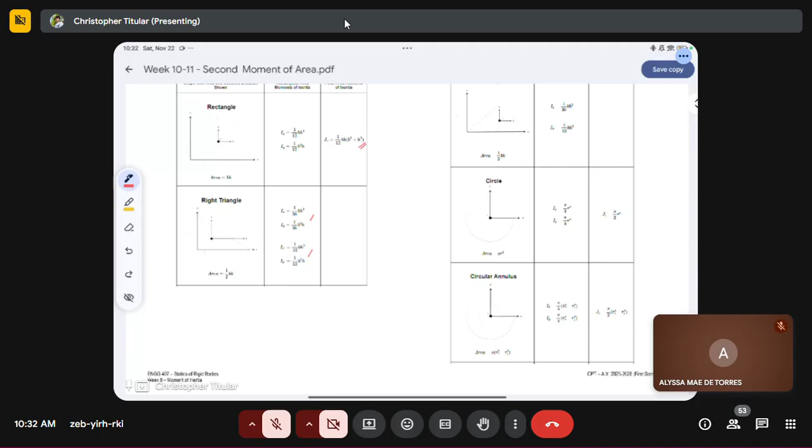So for this day, our topic is about radius of gyration. If we talk about radius of gyration, it is an imaginary distance from an axis of rotation to a point where the object's mass or cross-sectional area can be considered concentrated to have the same moment of inertia.

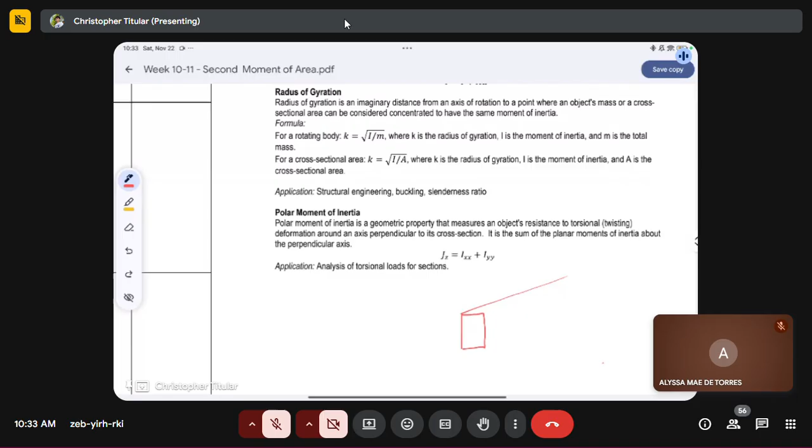As you can see here, for example, we have a length like this, a section like this, and at the span of our beam we have these supports: a pin and a roller. So for radius of gyration, which we refer to as K, it is the imaginary distance from the axis of rotation at which the mass or our cross-sectional area has the same moment of inertia.

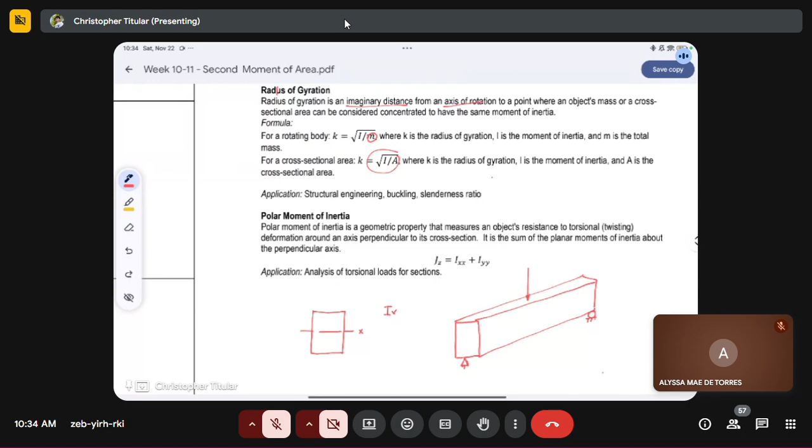For example, we have an applied force here, and we will be considering this section. We get our x here, and we solve for Ix. So if we solve for the radius of gyration using the cross-sectional area, mostly what we solve is the radius of gyration using the cross-sectional area, since using mass is mostly for rotating bodies, which is mostly for mechanical engineers. But for us civil engineers, we will be talking more about the cross-sectional area of our steel sections, beam sections, column sections. So after solving Ix, we have to solve for Kx, or K.

K is the square root of I over A. This K is our radius of gyration. So to solve for the radius of gyration, it is I over A. That means if we have an Ix here, therefore this must be Kx. But if we are talking about the y-axis, the formula is Iy over A. So the meaning of K is that from the x-axis, we have this radius.

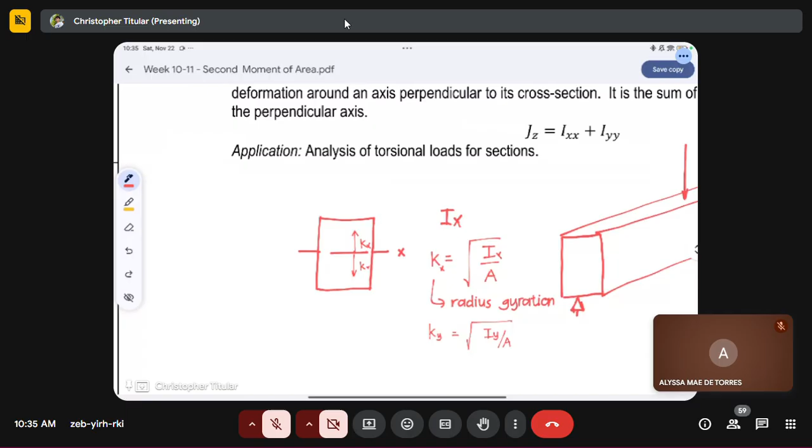So let's say this is our K, our Kx. This Kx is the distance at which we could consider that the moment of inertia from the distance Kx from the x-axis is equivalent. So basically, the reaction or resistance of our section from the x-axis using the radius of gyration at x, Kx, is equal. That is the main definition of radius of gyration.

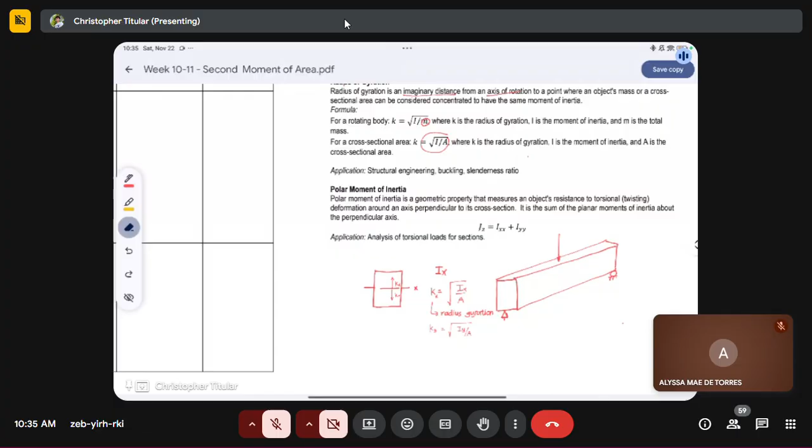On the other hand, I've listed here the uses of radius of gyration. In structural engineering, it specifically refers to buckling or slenderness ratio. The more slender our section is, or the larger our slenderness ratio is, that means our radius of gyration is small, meaning it is not appropriate to use some sections which have a higher slenderness ratio.

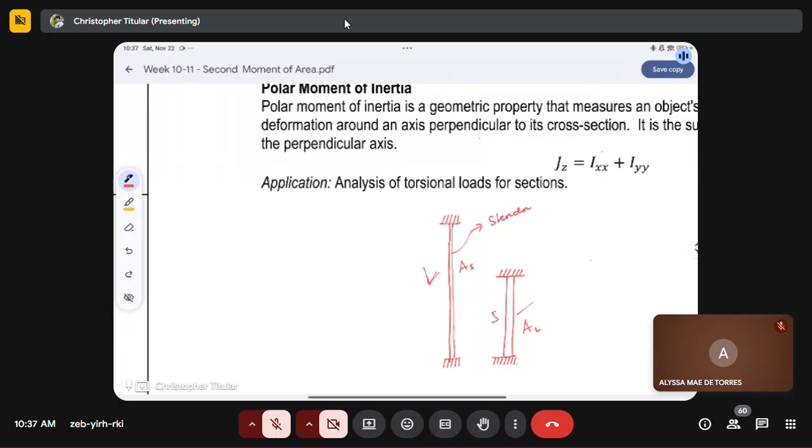So as you can see, lower yung ating slenderness ratio, the better. We must consider that on the design. So that's how we use, or that's how we need to know ano ba yung radius of gyration ng ating section.

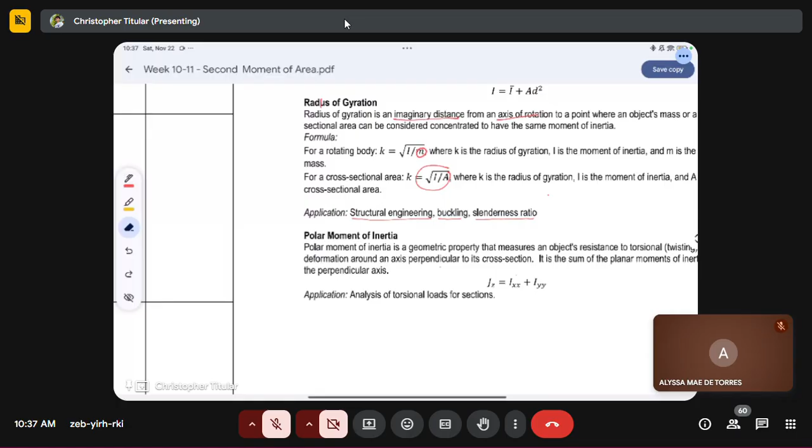Okay, so next topic that we will be discussing today is the polar moment of inertia. Unlike dun sa ating moment of inertia or second moment of area, so sa second moment of area is just Ix and Iy, or Ix prime or Iy prime. But polar moment of inertia is the summation of Ix and Iy, or Ix prime and Iy prime.

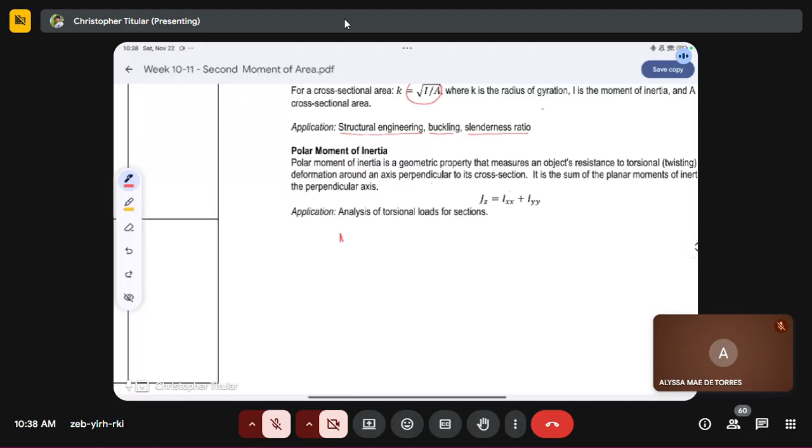So ano naman yung nire-resist ni polar moment of inertia? If we have the moment of inertia, sulat ko dito. So if we have moment of inertia, and then we have the polar... send ko na to kay Crystal. Si Crystal ang gagawa ng moment of inertia.

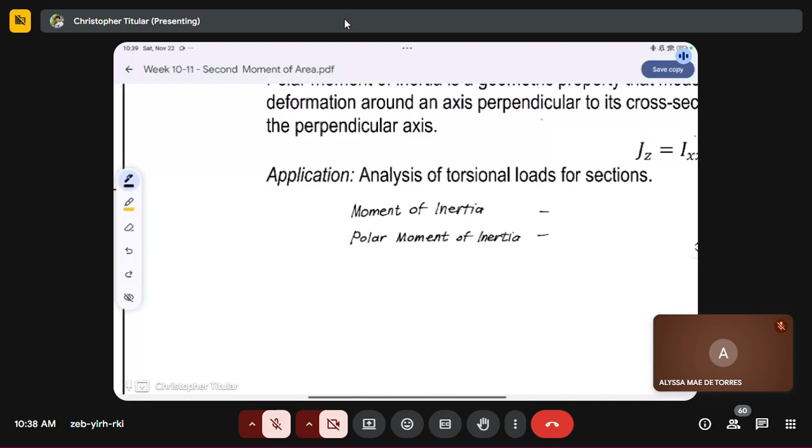So again, ano yung nire-resist ni moment of inertia? Ask ulit, si Princess Lavinia, ano ang nire-resist ng moment of inertia? If nakikinig last week, ano yung nire-resist ni moment of inertia? Nakinig ba? Si Nikailaan, nakinig ka ba last week? So wala nakikinig last week. Kaya wala napasa, ganun? Sige, take nyo na lang, bahala ka sa buhay nyo.

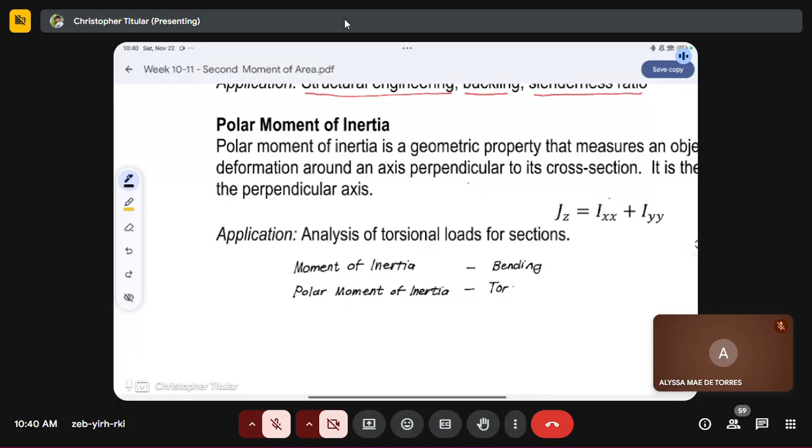So si moment of inertia, it resists bending. Unlike polar moment of inertia, it resists torsion. Ayan, kakatamad magturo pag ganito. So ano ba yung tinutukoy natin na torsion?

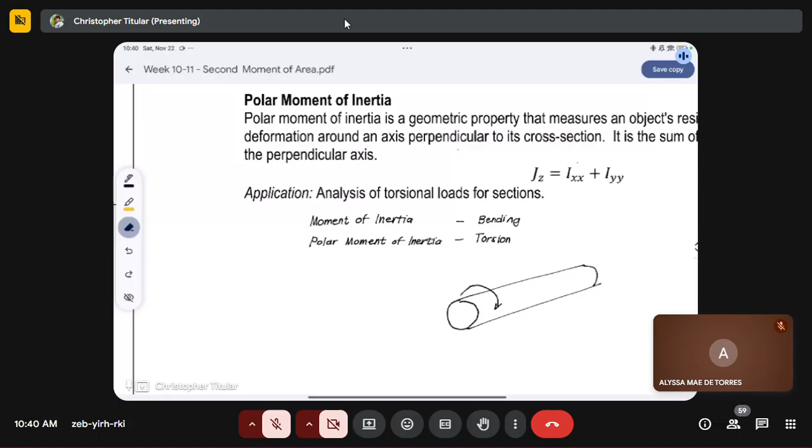For example, we have here a circular section, and then we have here this length, and then meron tayong in-apply na moment dito. So paikot siya, so ang tendency is that, mas better siguro if we will be having a rectangular section as an example. So this one is our rectangular section. Meron tayo nilagay dito, or in-apply na torsion, moment, torsional force. So ang tendency ng shape natin is that it would create deformation on this.

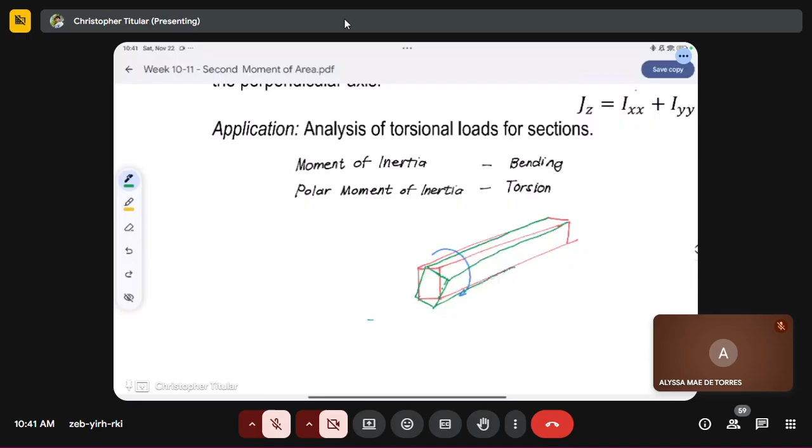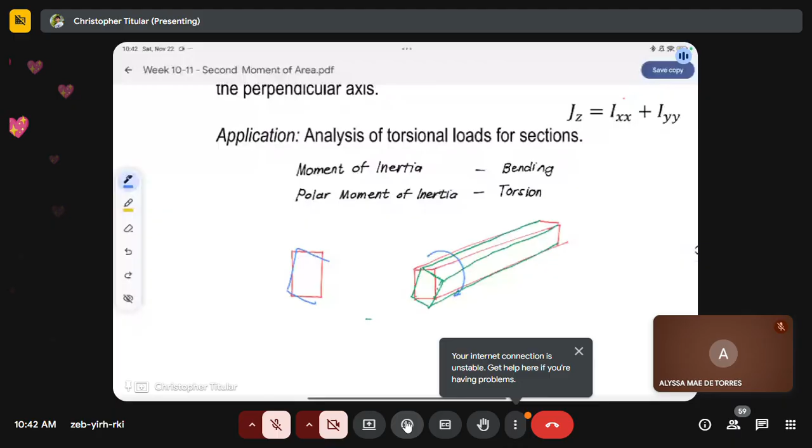So ito ko nilang kulay. Nakikita nyo ba yung torsion na tinutukoy ko? O masyadong mahina yung imagination? So if we have this, wala kasing sinasagot. Okay miss. So yan, yan yung tinatawag na torsion. It is the rotation of the shape or yung cross-sectional area natin on the X and Y axis.

If we have the torsion, so we need to resist it using a higher polar moment of inertia, for which ang ibig sabihin pala, so we have the moment of inertia resisting bending at an axis. But if we are talking about two axis, or yung torsion natin, so we will be using a higher polar moment of inertia to resist that torsion. So intindi ba yun? Naintindihan nyo ba?

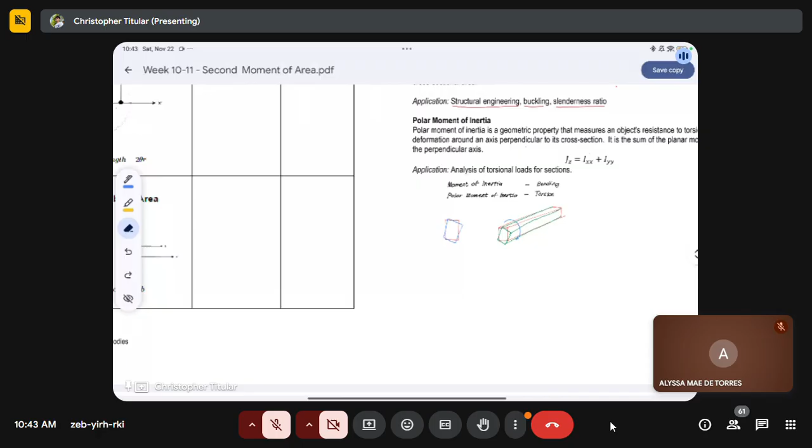So yun, yun yung difference ng radius of gyration, polar moment of inertia, and moment of inertia or second moment of area. So you need to master kung paano kunin yung moment of inertia, kasi kapag mali na yung pagkuha nyo ng moment of inertia, meaning mali na din yung polar moment of inertia nyo in case napakuhanin. So in that case, wala kayong magiging score. So that you need to focus more on moment of inertia. And then after getting the concept of moment of inertia, therefore it is easier for you to define or to find the value of polar moment of inertia and also the radius of gyration in case na pinapahanap sa inyo sa problem.

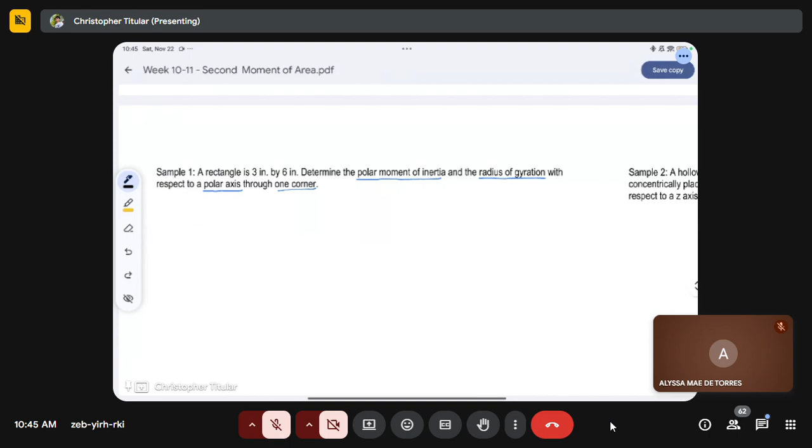So for our example 1, it is a rectangular 3-inch by 6-inch. Wala siyang figure but I'll be having here the figure, drawing ko na lang siya. So ang sabi, we have a 3-inch by 6-inch na rectangle. So in case naman na sa problem, for the major exams and quizzes, I'll be giving some figures para hindi malito kung alin ba yung base and height doon. So we have here problem, 3-inch by 6-inch, and ang pinapahanap sa atin is polar moment of inertia and radius of gyration with respect to the polar axis through one corner. So ibig sabihin, let's draw the figure. So meron daw tayo dito, meron daw tayo ditong rectangle.

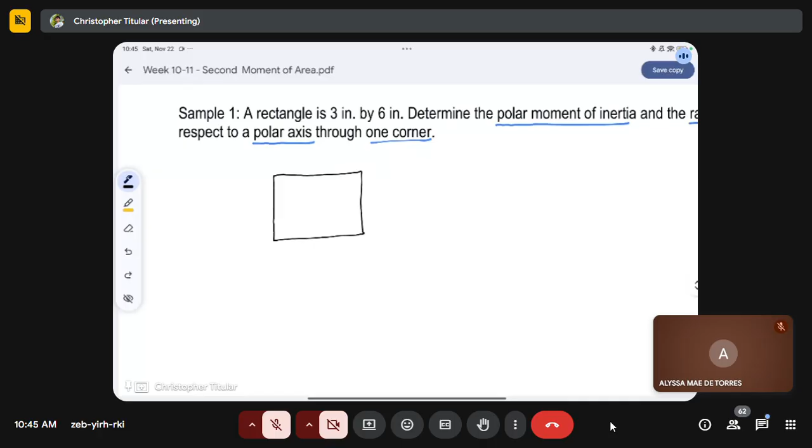We have a 6-inch base and a height of 3 inch. The axis must be on one corner, so let's use these two corners. This one is the y-axis and this one is the x-axis.

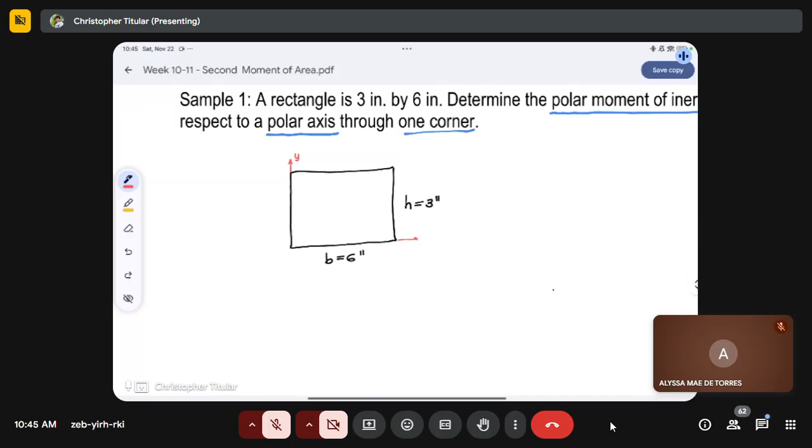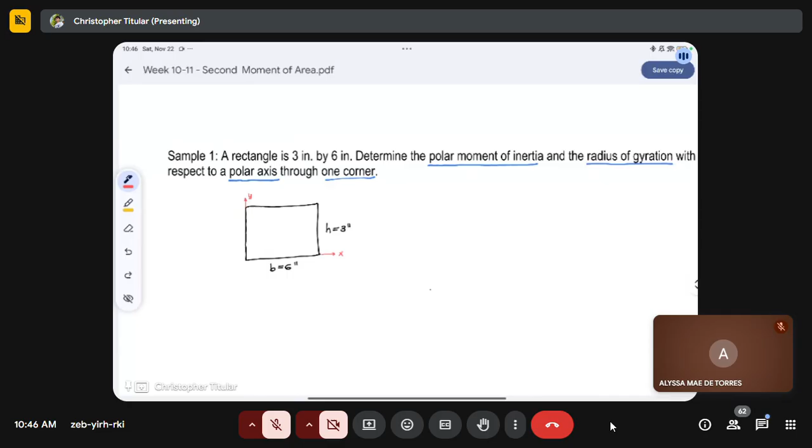What is the first step when finding the polar moment of inertia and radius of gyration? First, we need to find Ix and Iy. So we have Ix equivalent to BH cube over 12, or BH cube over 3. BH cube over 12 is for our centroidal axis.

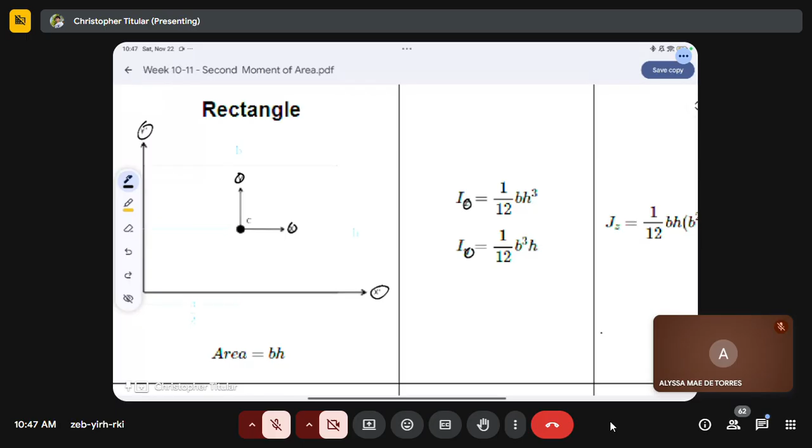If we look here, for the rectangle we have x prime. This is what's being referred to, or what we're looking for in the problem, x prime and y prime. The given to us is x and y axis. Meaning we need to transfer this using the transfer formula of our moment of inertia.

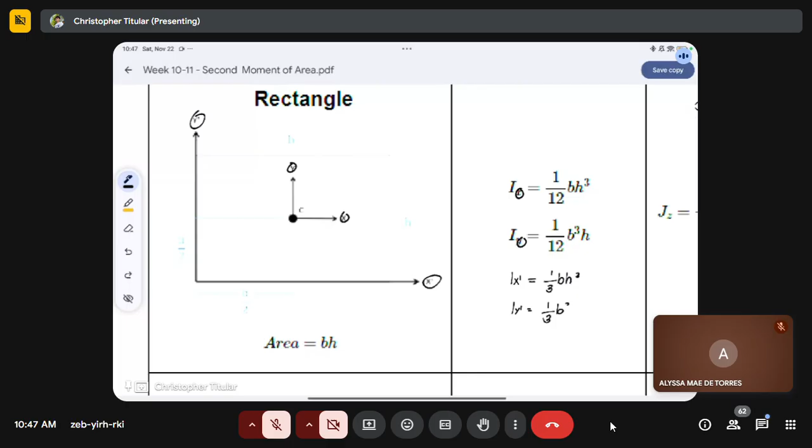But last week we already solved it. So Ix prime is equivalent to 1/3 BH cube and Iy prime is equivalent to 1/3 B cube H. Remember how the transfer works? That is the centroidal moment of inertia plus area times d squared. If you've forgotten, review it because it may appear on the exam.

But let's try to transfer it. So for example, let's do y prime and x prime. We have the given, y and x axis, such that this distance is half of h, which is 1.5 inch. And here, this is base over 2, so 3 inch.

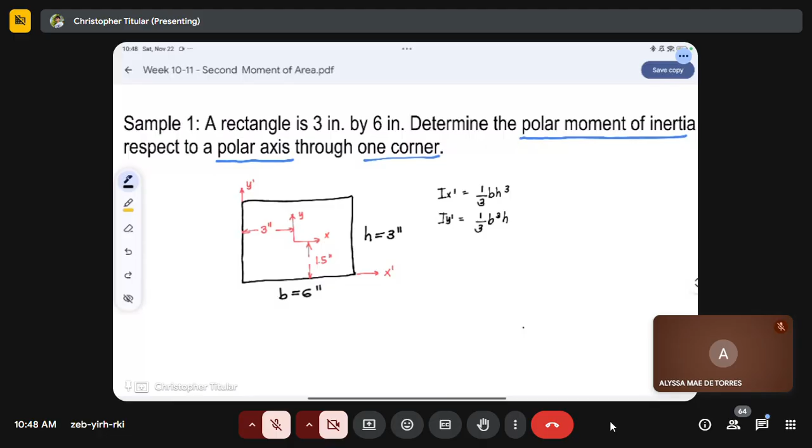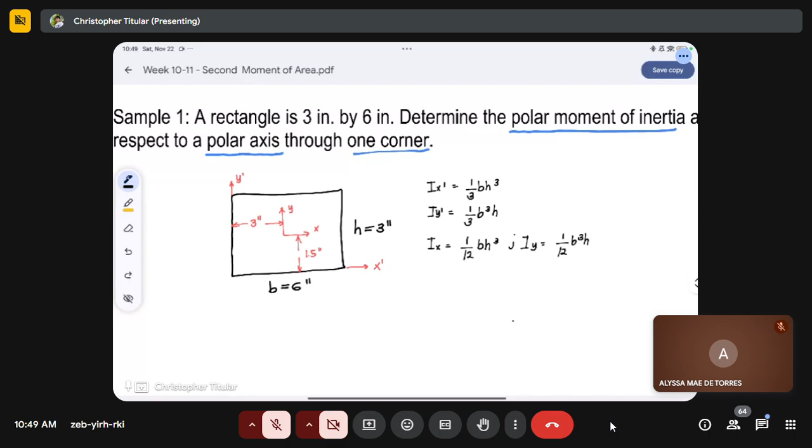So we can transfer it. Let's prove that Ix prime is equivalent to 1/3 BH cube and Iy prime is equivalent to 1/3 B cube H. Let's use the given from our table: Ix is equivalent to 1/12 BH cube and Iy is equivalent to 1/12 B cube H.

Let's use the transfer formula. I prime is equivalent to Ix or Iy plus A D squared. So Ix prime is equivalent to 1/12 BH cube plus the area of the rectangle, BH, times D, which is the distance from the x-axis to x prime, h over 2, squared. Therefore this is 1/12 BH cube plus 1/4 BH cube. Solving this, we get 1/3 BH cube.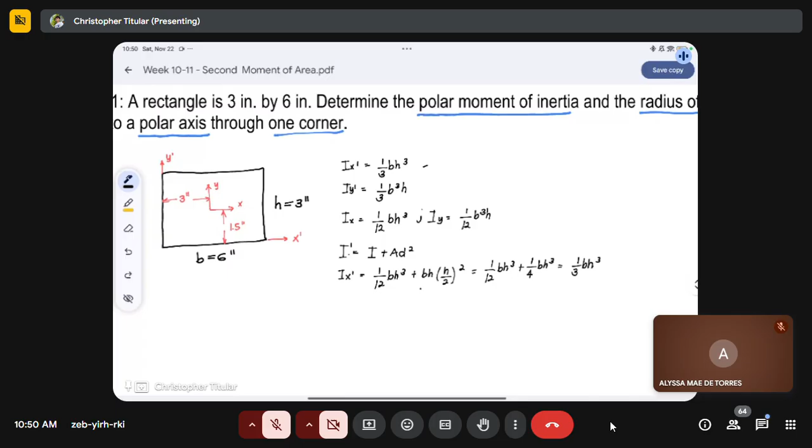So that's correct, we proved that Ix prime is equivalent to this value. Same approach with Iy: Iy prime is equivalent to 1/12 B cube H plus the area times base over 2 squared. Same approach, only the cube changes. So the answer is also 1/3 B cube H. We proved that Ix prime and Iy prime are equivalent to 1/3 BH cube and 1/3 B cube H respectively.

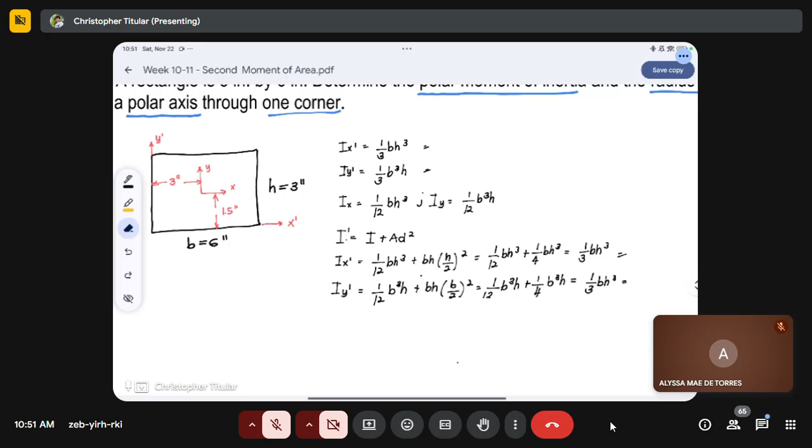Now let's try to solve for the moment of inertia. We have Ix prime equivalent to BH cube over 3. So we have 6 inch times 3 inch cube over 3. The answer is 54 inch raised to 4.

And then we have Iy prime, which is B cube H over 3. So this is 6 cube times 3 over 3, which is equivalent to 216 inch raised to 4.

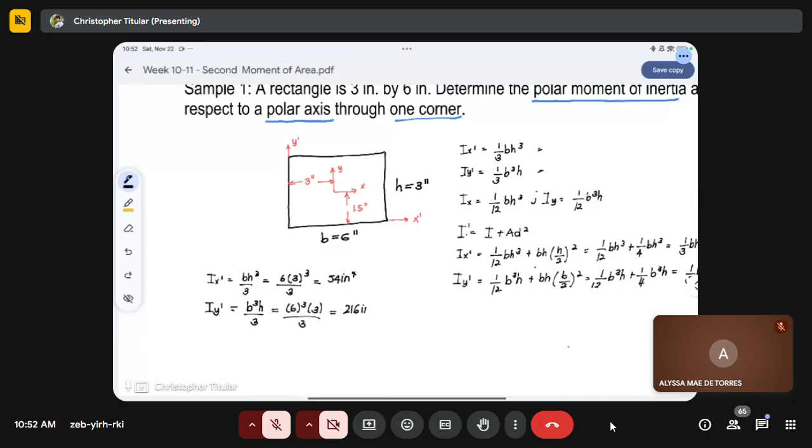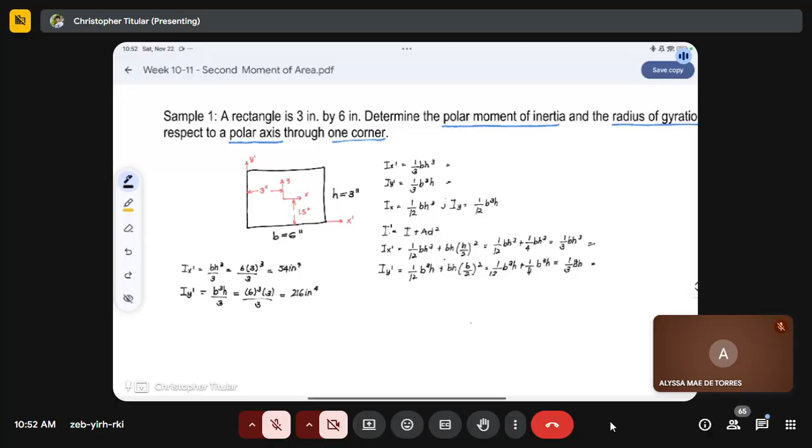But what's being asked is the polar moment of inertia. The polar moment of inertia, Jz, or the moment of inertia on the axis, is just the summation of our x and y moment of inertia on the same axis. Meaning for Jz, Jz is equivalent to Ix prime plus Iy prime. So we have 54 inch raised to 4 plus 216 inch raised to 4. Meaning our polar moment of inertia on the corner is equivalent to 270 inch raised to 4, and that is our answer for the polar moment of inertia on the one corner.

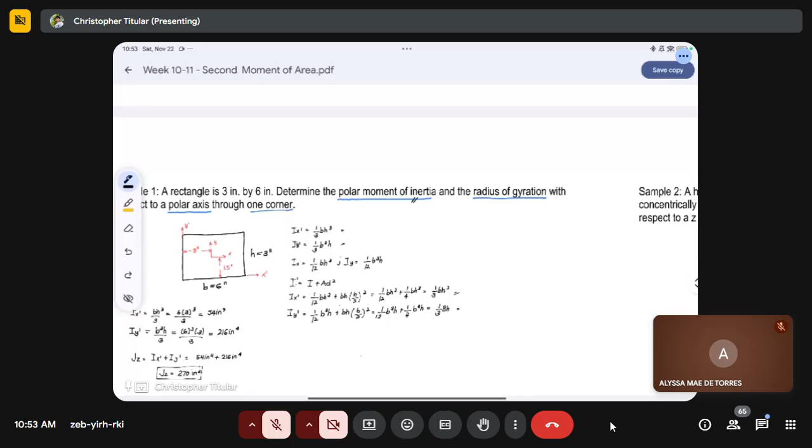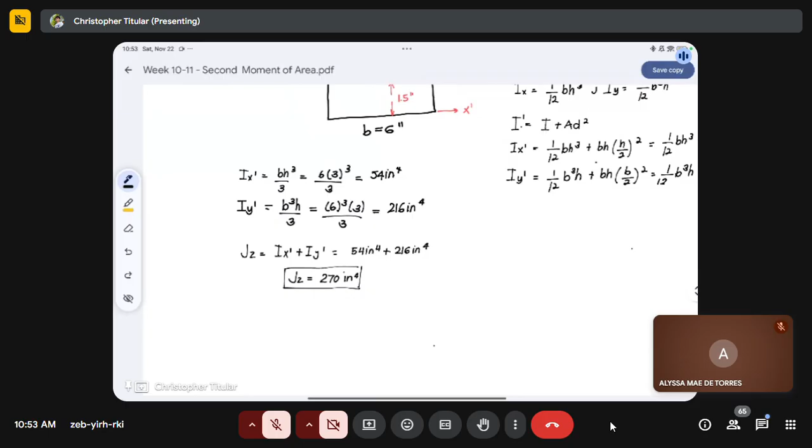So that means even if you compute the moment of inertia at the corner, the answer is the same, since what's being asked is the polar moment of inertia on the axis. Same with the radius of gyration—what's being asked is the radius of gyration with respect to the polar axis through one corner. So that's for Jz or Kz.

So this one is equivalent to... it is equivalent to the summation of Kx plus Ky.

So both prime, or simply square root. What is our formula for K? K is equivalent to square root of I over A. Meaning for Kx prime, it is equivalent to square root of Ix prime over A. And for Ky prime, this is equivalent to square root of Ixy or Iy prime over A. Meaning this one is equivalent to square root of Ix prime plus Iy prime over A.

Or simply, square root of Jz over A. So therefore, for Kz, it is equivalent to square root of 270 inch raised to 4 over our area. What is our area? It is base times height, which is 6 inch by 3 inch. So if we solve for Kz, the answer is 3.873 inch. So this would be our answer for example number 1.

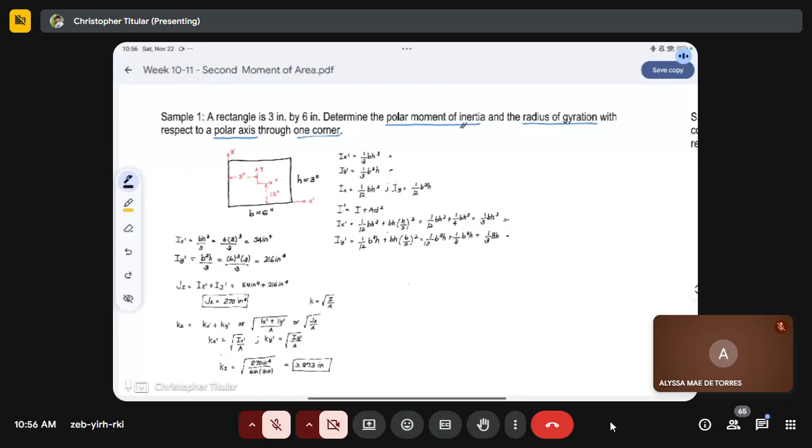So Kz is the radius of gyration with respect to the polar axis. If we talk about the polar axis, that is the intersection. So here, radius of gyration with respect to polar axis, because it wasn't specified as radius of gyration with respect to x-axis or y-axis. If we talk about polar axis, meaning you will be using the polar moment of inertia.

So in case what is asked is radius of gyration, what is that? Radius of gyration on, for example, x-axis, the one to use is square root of Ix over A. But if we talk about y-axis, it refers to square root of Iy over A. But if we talk about polar axis, meaning it is the square root of Ix plus Iy over A, or simply square root of our J over A. So that's how you analyze the problem.

Is that clear? Okay. So let's proceed to the next. So the next sample problem is...

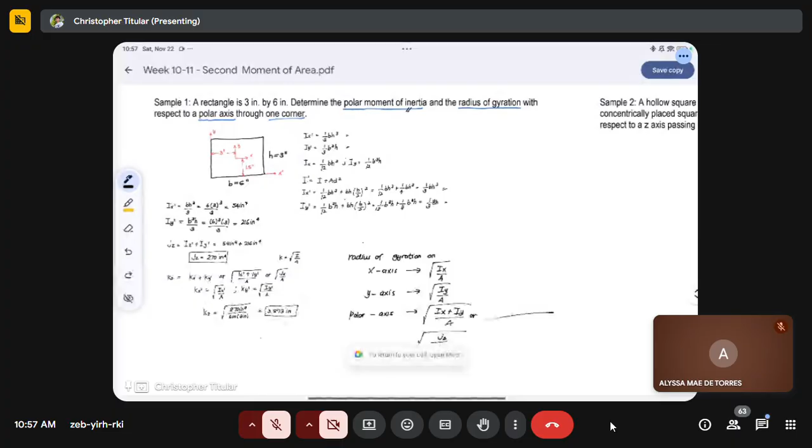Also simple, but it has a hole in the middle. So let's try to draw first its figure. Wait a moment.

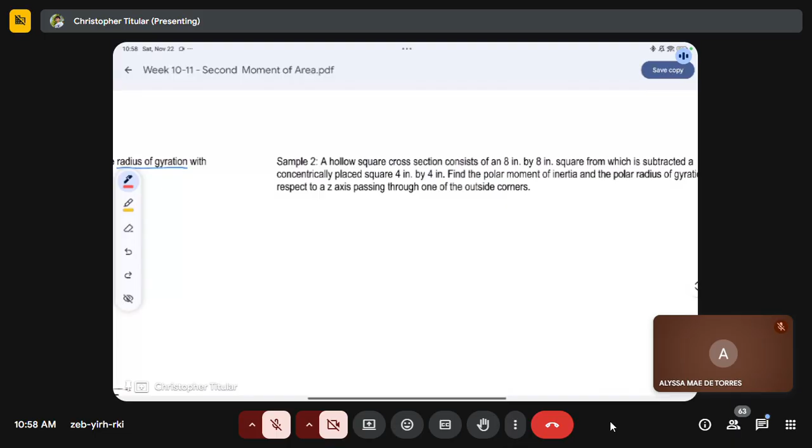The problem says: we have a hollow square cross-section consisting of an 8 by 8 inch square from which, concentrically, meaning at the center of the 8 by 8 square, we have a punch or hole of 4 inch by 4 inch. Then we need to find the polar moment of inertia and polar radius of gyration. Meaning polar, we will be using I or J with respect to the z-axis passing through one of the outside corners.

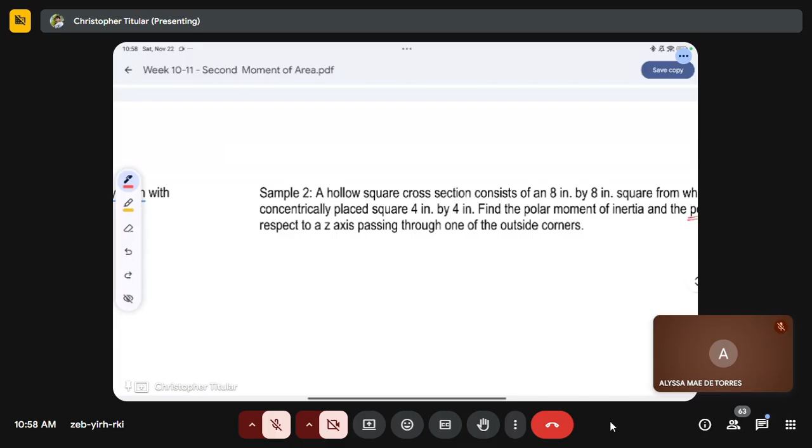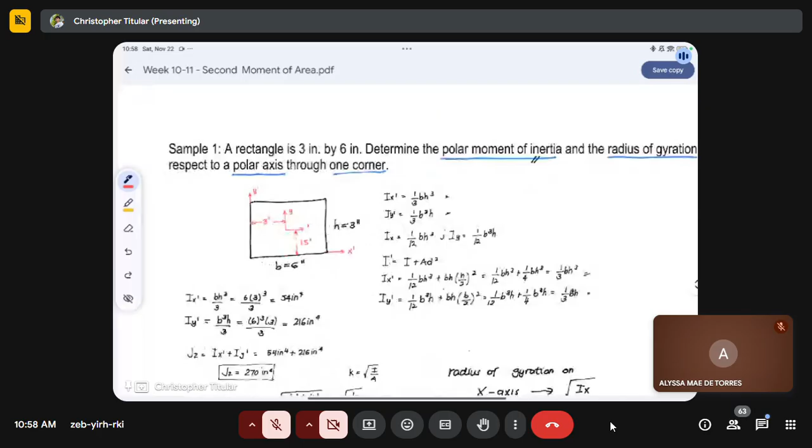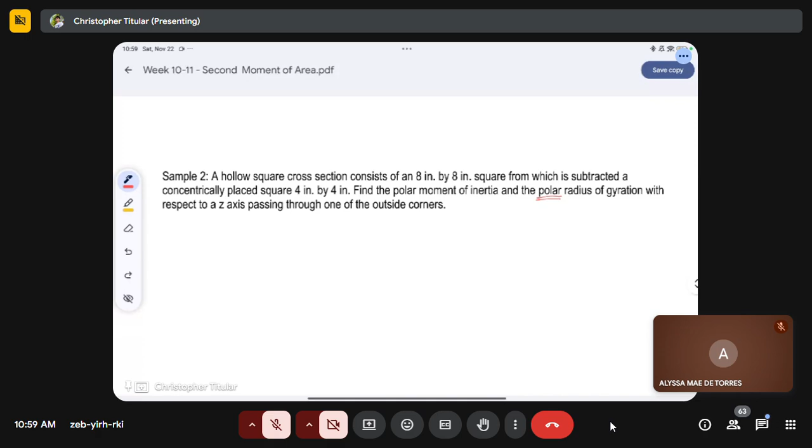So for example, on this problem, we need to find the polar moment of inertia and polar radius of gyration with respect to the z-axis passing through one of the outside corners. So for example, we have here an 8 by 8 inch square. Wait a moment.

This one. So concentrically, meaning the centroid of this is equivalent to the centroid of the other. For example, this, my mistake, this is the y-axis. So this is the centroidal axis of our big square, which is 8 by 8 inch. And then concentrically, meaning the centroid of our big square is also the centroid of our hole. So let's draw it.

So we will have a smaller hole here or smaller square. So this one is... 2 inch. 2 inch, ah, 4 inch actually. 4 inch. Let me just complete the drawing.

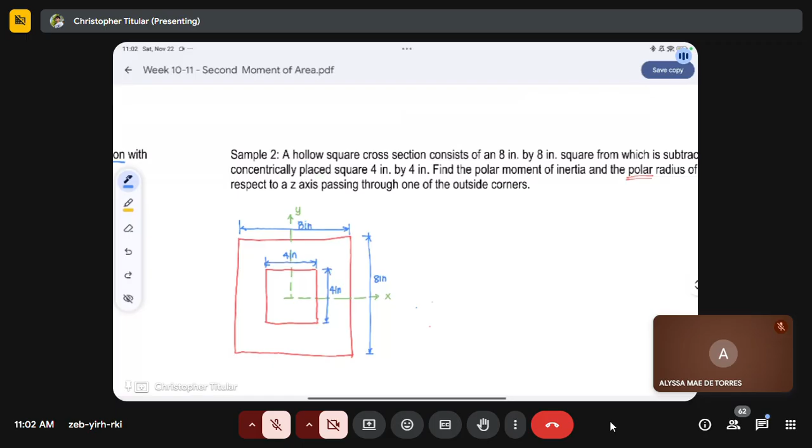Ayan, yung figure natin. We have to determine the moment of inertia or polar moment of inertia and the polar radius of gyration at the z-axis passing through one of the corners. Meaning yung ating x and y axis, ayan. So ito yung ating y prime, at ito yung ating x prime. And then ang sabi, we have the z-axis.

So gawin nating 3D figure. So this is our z-axis. Itong section na to, i-consider natin siya as 3D figure, so mag-extend siya all throughout that side, para ma-consider natin or ma-visualize natin yung ating z-axis. Kaya nagkaroon tayo dito ng z-axis.

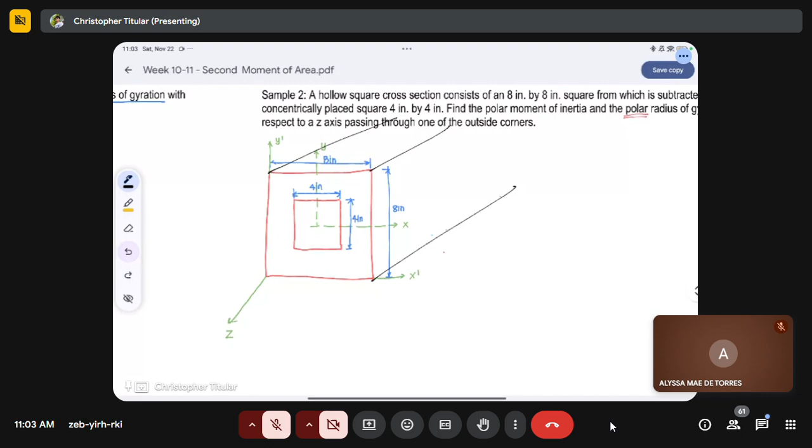Naintindihan ba yon? So you will be considering an extension para magkaroon tayo ng z-axis. Either of the sides or either of the corners you can consider, parehas lang yung magiging sagot natin.

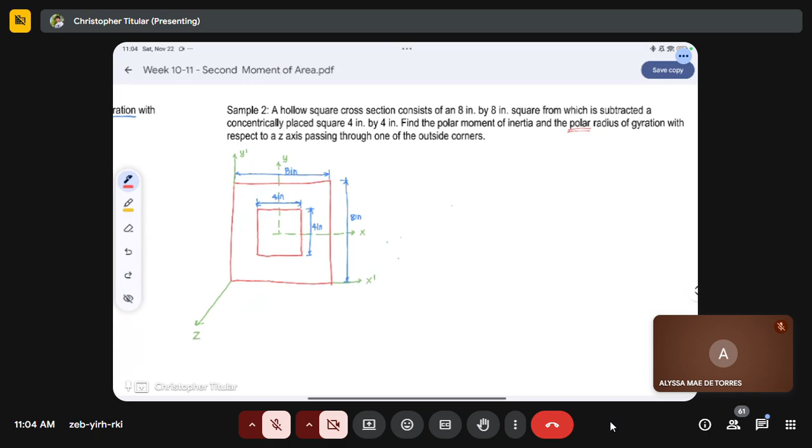Okay, so first thing is that we need to determine Ix and Iy. Consider muna natin, since may hole, so mag-table tayo or mag-tabulation tayo. Let's try to use tabulation. Consider natin yung ating big square as number 1 and si small square naman yung hole, yung number 2.

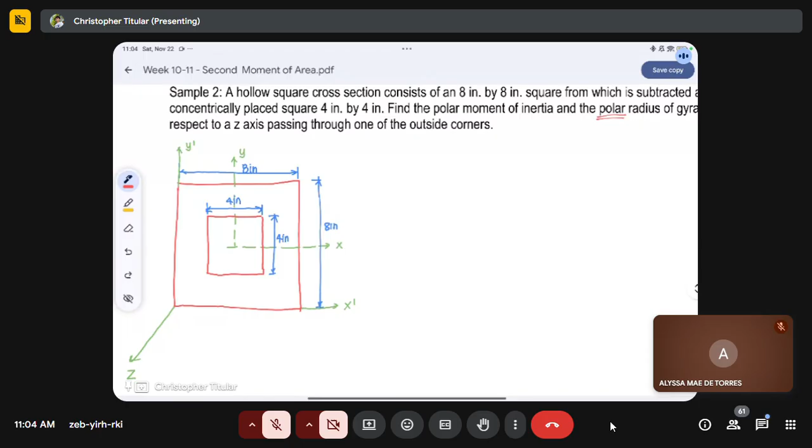So for area, for example figure 1, figure 1 is the bigger one. Ano ba magandang ipangalan? So we have shape na lang. So we have 1, which is the big one, and 2, which is the hole. And now we have to determine the area in inch square.

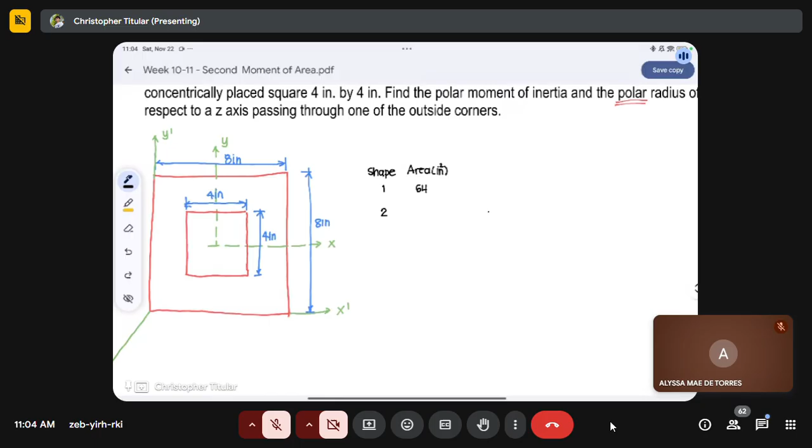So yung area ng big natin is 8 by 8, which is 64 inch square. And then for smaller, or yung ating hole, that is 4 by 4, which is negative 16 inch square. Bakit negative? Since it is a hole, dapat isubtract natin yung area niya.

Ayan, and now let's consider the centroidal moment of inertia, for Ix and for Iy. Later we will be transferring it. So kung i-consider natin si Ix, ano ba yung formula ng Ix natin? Ix is centroidal, so it is 1 over 12 BH cube. And then for Iy, it is 1 over 12 B cube H.

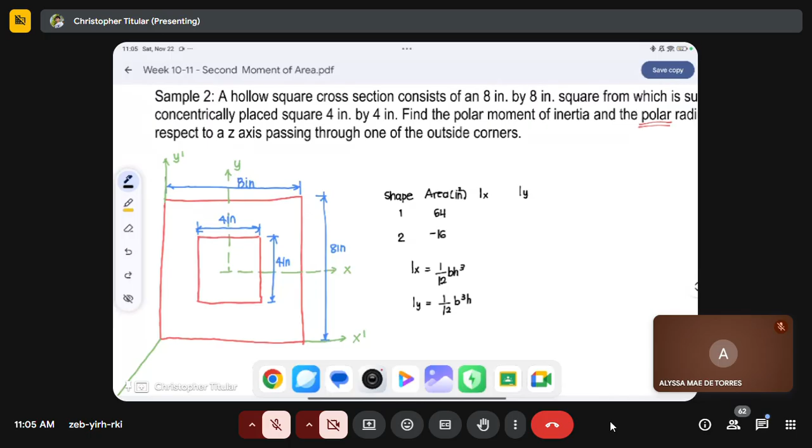May question ba? Guys, may question? Joyce, may question ba ko, Joyce? Pamute na lang pag walang question. Yan, halatang walang tao, yan.

Siguro napindot lang, ayan. So we have Ix and Iy, so we have here the formula for Ix and Iy. Let's try to solve yung Ix muna, so Ix for the bigger square, if we use the formula, that is 1 over 12 times base niya, which is 8 times 8 raised to 3, since 8 din yung height niya.

So meaning this one is 1024 over 3, or simply 341.333 continuous siya. And then for kanyang Iy, same lang din siya, since base and height is similar or equal. So we will be having 341.333 continuous. Ayan, and now let's consider the hole.

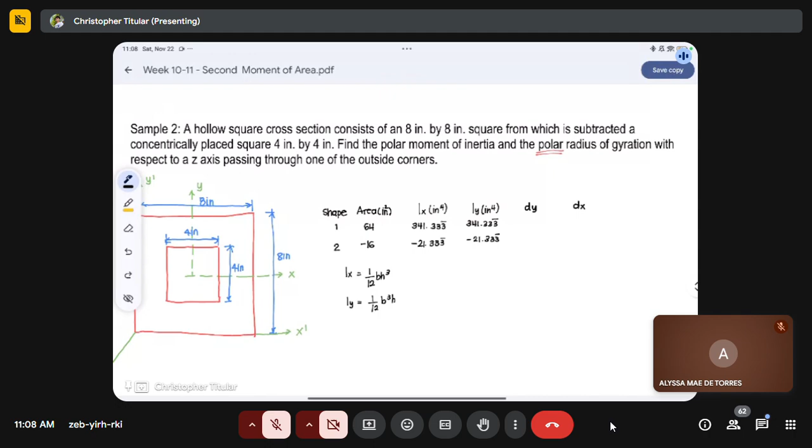So now let's determine ano ba yung dx and dy natin. So we have dy and then we have dx, in inch. Si dy muna tayo, si dy in inch. Meaning, from the centroidal moment of inertia natin or yung x natin, ano yung distance niya dun sa kukunan natin ng moment of inertia, which is the x prime. So we need to determine this. This one is our dy and then this one is our dx.

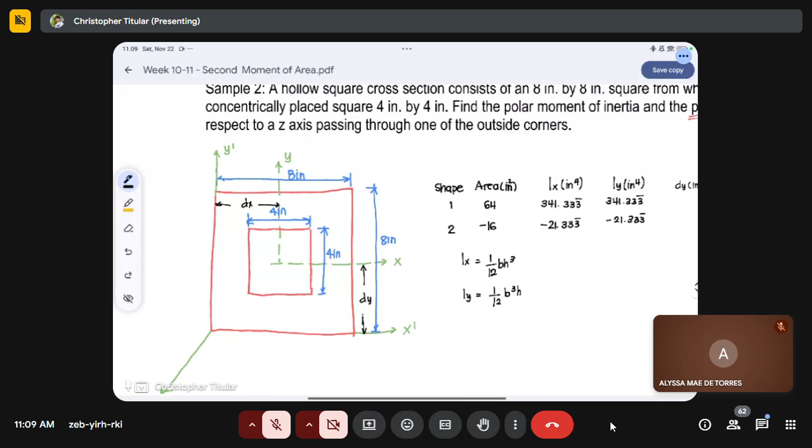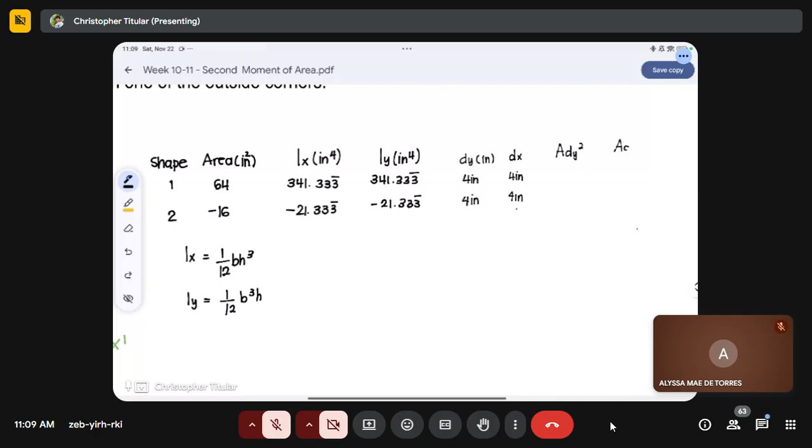So now I'll be giving you time to solve for ADXY or ADY square and ADX square. So kayo naman yung mag-solve. Then I'll be trying to ask some of you mamaya if same naman yung nakuha nating values.

What's the value? So that is 1024, right? So 1024 inch raised to 4. And then similar with ADX, so ADX squared. It's the same naman, so that is also 1024.

And then for shape 2, since the area or hole is negative, so that must be negative. So negative 16 times 4 squared. So that is negative 256 for both ADY squared and ADX squared.

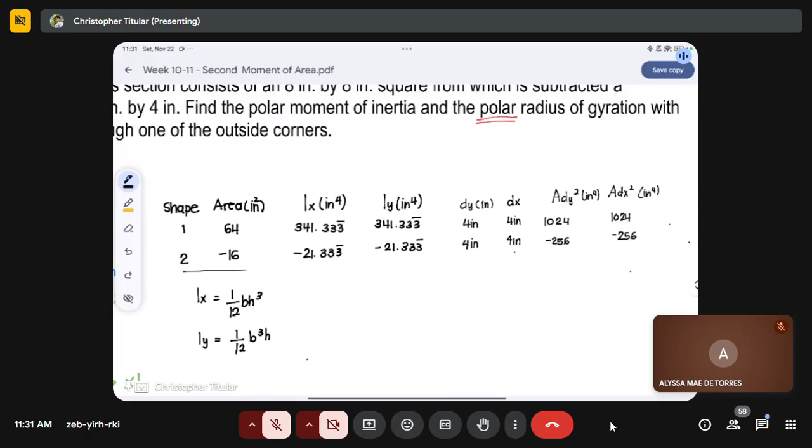Now let's try to get the summation. So what is our formula for Ix prime, or our transferred moment of inertia? So it is the summation of Ix plus ADY squared. Similar with Iy prime, it is equivalent to the summation of Iy plus ADX squared.

So meaning we need to sum this four columns. So for this one is equivalent to 320. This one is also equivalent to 320. And then for this one, so 1024 minus 256, so that would be 768.

So we will be using this formula, summation of Ix, that's 320, plus summation of ADY squared, that is 768. So this is equivalent to 1088 inch raised to 4.

So same approach with Iy prime. So that is also 320, and then our ADX squared, plus 768. So this one is equivalent to 1088 inch raised to 4.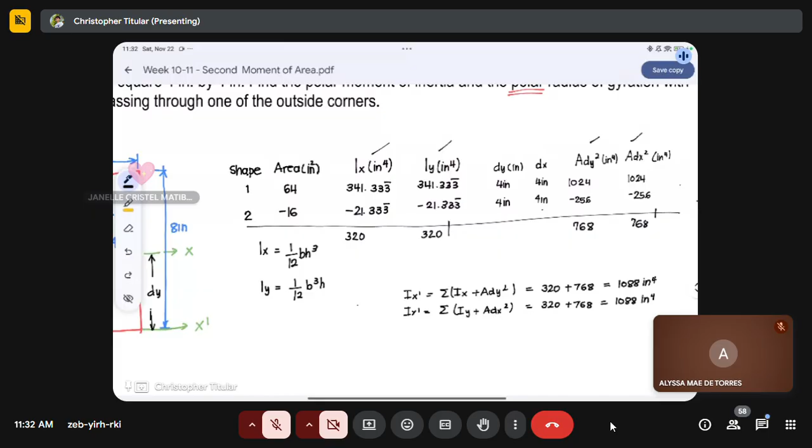After this, we can now get the value of the polar moment of inertia on the z-axis. So Jz is equivalent to Ix prime plus Iy prime, it is just the summation. So this is 1088 inch raised to 4 plus 1088 inch raised to 4. If you solve for this, this is equivalent to 2,176 inch raised to 4.

So this would be one of our answers. So this is our J.

Now, what we also need to find is the value of the polar radius of gyration, meaning we are talking about Kz. It is equivalent to the square root of Jz over A. Or simply, if we expand it, it is the summation of Ix prime over A plus Iy prime over A. Now we have the value of A here.

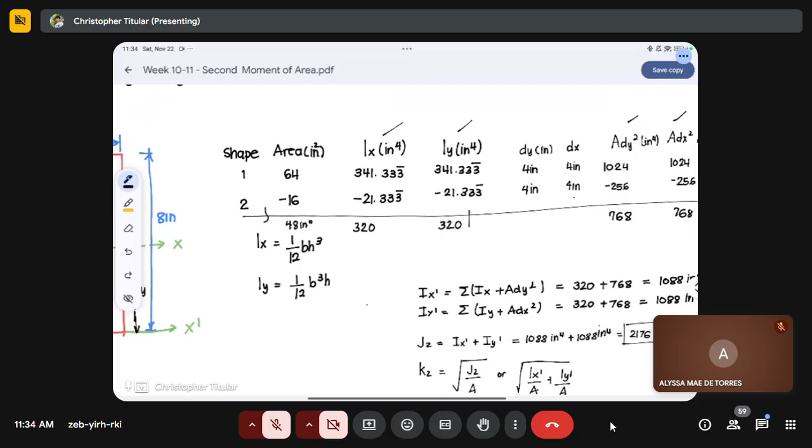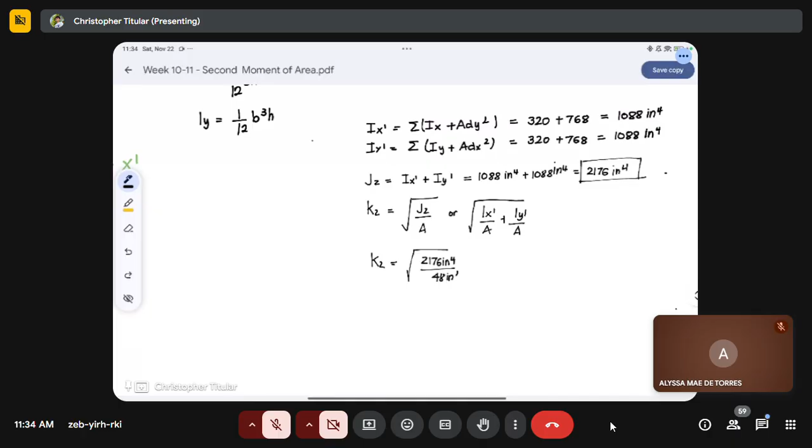So now we could compute for the value of radius of gyration. It is equivalent to 2176 inch raised to 4 over 48 inch squared. So now the value of our Kz is equivalent to 6.733 inch. So this is the value of our Kz.

Please take note of the unit analysis. So if we have here inch raised to 4, then we have inch squared, therefore only inch squared will remain. Therefore, the square root of our inch squared must be inch. So meaning the value of our radius of gyration must be in unit length. Okay, so that's how you solve for polar radius or radius of gyration and moment of inertia.

So Miguel's question is whether the dx and dy of shape 2 are intentional. So we said that dx and dy of a shape is the distance of the centroidal axis from the axis where we are getting the moment of inertia. If we look at the figure, the centroid of shape 2 and shape 1 is at this point. So we said, dx and dy is the distance from the axis that we need to get the moment of inertia.

So as you can see, siguro nalito siya kasi kapag kinonsider natin yung figure, yung distance ng centroid ng small circle or small square, yung hole natin, is also similar with the distance ng centroid ng bigger square sa x and y axis.

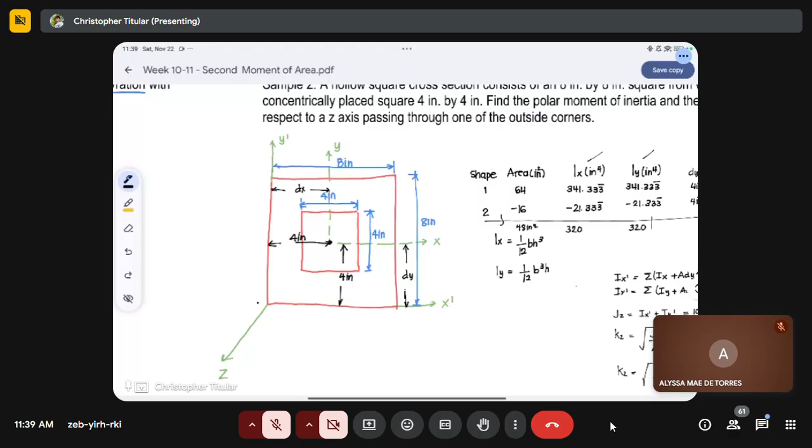So if we look here, ito yung x-axis or centroidal x-axis ng smaller square. So yung distance niya from this is also 4 inch. And then same dito, pag sinukat mo siya dito, this is also 4 inch. So siguro nalito siya that it could be half. But if you will be using half ng ating base and height ng small square, hindi siya, wala siya dito sa ating x prime and y prime axis. Nakalutang pa rin siya.

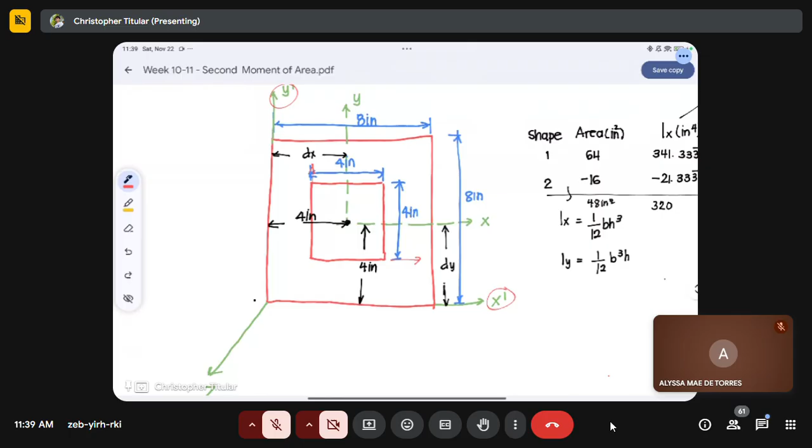You need, dapat sagad yung distance measurement. So nagets ba yun? Architect, tsaka electrical, yung iba, may questions pa yung iba? Electrical... So wala nang questions.

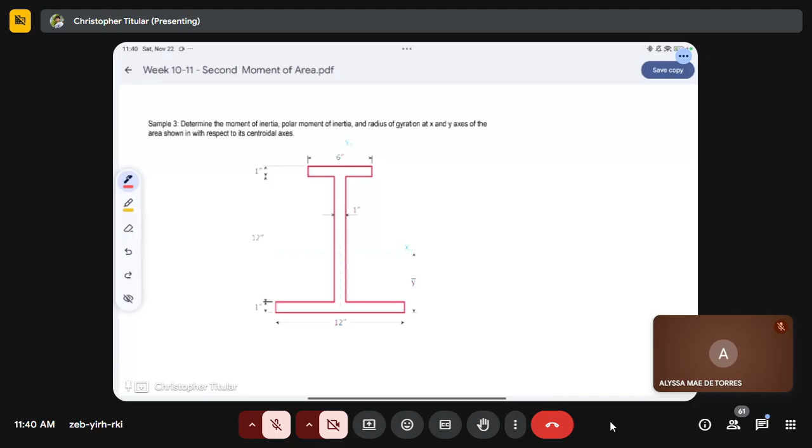Here you will be determining the moment of inertia on the Y naught, E3 di ba, and X naught axis. So lagay ko na lang dito. Basta update kita, may tapos to ngayong weekend. X naught and Y naught, ito yon, Y naught and X naught.

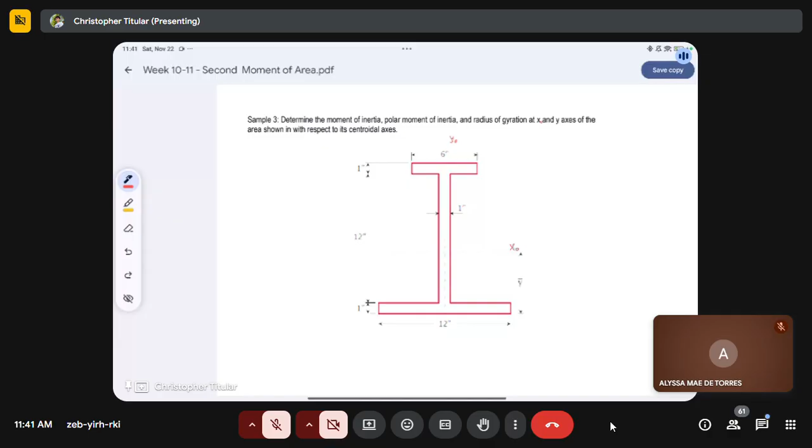So nakuha na natin last week yung radius of, or moment of inertia. So all you need to do is to get the polar moment of inertia on the X naught and Y naught axis. And then ang need niyo is JZ naught. And then you have to get the KX naught and KY naught, also determine also yung ating KZ naught. So kumbaga dito yung Z naught natin.

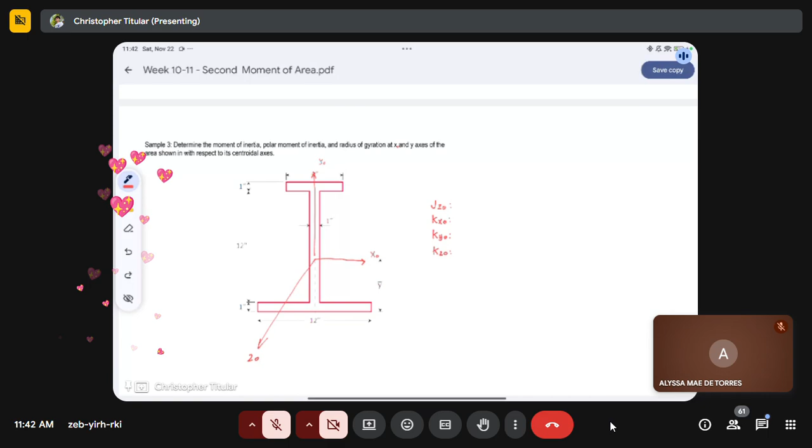So we've already get the value of I X naught last week, so kayo na yung bahalang mag-solve. Madali lang naman siya, so try to solve this as a practice problem. Kanya na siguro, but it would not be passed. Solve niyo lang as your own practice, and then pwede niyo siyang i-include dun sa inyong final project. Kunyari, for moment of inertia, polar moment of inertia and radius of gyration, you could use this problem.

May nagtatanong sa akin, if yung problem for the final project is 30 problems lang daw ang hihingin. Napakaunti naman ng 30. So up until mid-finals, 30 is for per topic siya. For example, for the second moment of area, included na dun yung polar moment of inertia and radius of gyration, so you could get 30 problems for all 3 of those topics kasi included siya sa isang topic, which is the second moment of area.

So for example, next topic natin is structural analysis. On structural analysis, we will be having 2 subtopics: methods of sections and methods of joints. Ibig sabihin, using methods of joints and methods of sections, you must present 30 problems. Ano, and then ang next topic natin is cable and catenaries, meron tayong cables and arch, iisang topic yon.

Kumbaga yung analysis natin on those structures is we will be having similar approach, meaning using those 2 subtopics, you will be presenting 30. So meaning ang need niyong ma-solve for these finals must be at least 90 problems. If you will be exceeding 90 problems, that is better. But if it is less than 90 problems, I think you will be short for the final requirements. The more you solve, mas marami kayong maintindihan and mas marami kayong possible may sagot sa finals.